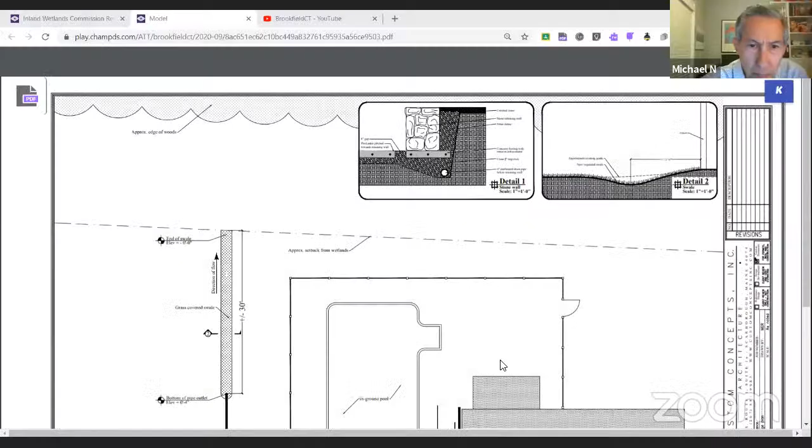Okay, I'm gonna share that to the screen. It's not 14, it's 17, I believe. Yes, sorry about that, 17 Old Turnpike.

So there's the swale, I see the house, I see the pool. And that's just a... Mark, I don't know, can you see that, Mark? There's the drainage and then there's...

Could I ask, which I can't tell from this, what is existing and what is the proposed change you're asking for right now? You want to tell him, Bill, or should I? Yeah, go ahead, Tony.

We brought the leader drains down, and we brought a drain from behind the wall out to daylight. When we brought it out to daylight it wasn't high enough to get the water to flow through the pipe behind the wall, so it needs to drop about 4 inches. In order to drop it 4 inches without creating a hole, we need to create a swale. So what we're going to do is go back to where it comes out from under the wall, which is where the belly of the pipe is, and bring it out lower, but then bring it down the yard towards the wetlands to get pitch so that it goes to daylight.

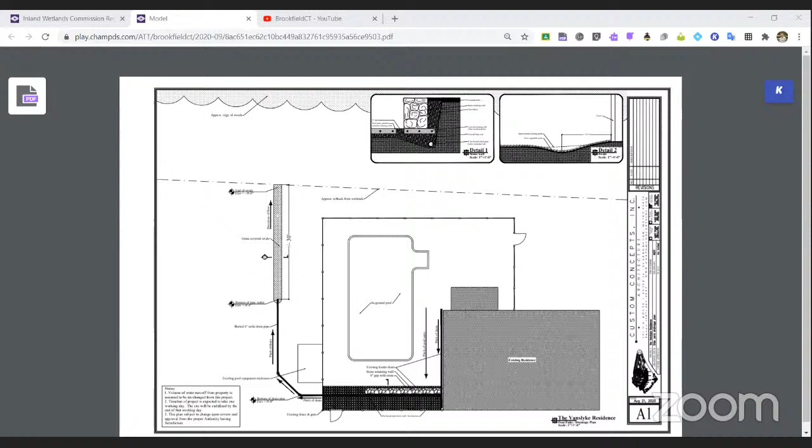I have 2 other questions for you. You have a note here that says the approximate setback from the wetlands. Is there supposed to be a distance associated with that? I'm not grasping why you've got that notation with an arrow pointing to a dotted line. Is that the wetlands line? Is that what you're trying to convey there? I thought it was. Is that right? That is the wetlands line, yes.

So that's not the setback from the wetlands, that's the wetlands line itself, which is what I interpreted it as. Is that right? Yes, that's correct. Okay, the wording is odd. And what is this detail 1?

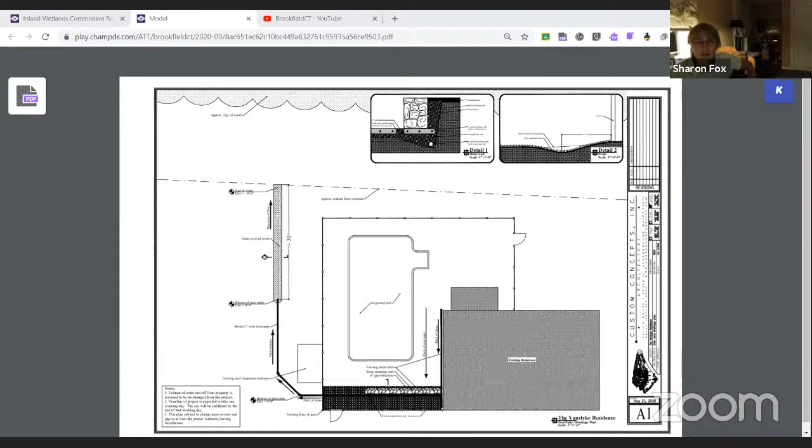There's a stone wall and pipe. That's showing what's behind the wall, that's the pipe with the belly in it. Too small for me to read. Where is that located physically? It's on the drawing, just below the pool. It's the only wall on the drawing. It looks like stone.

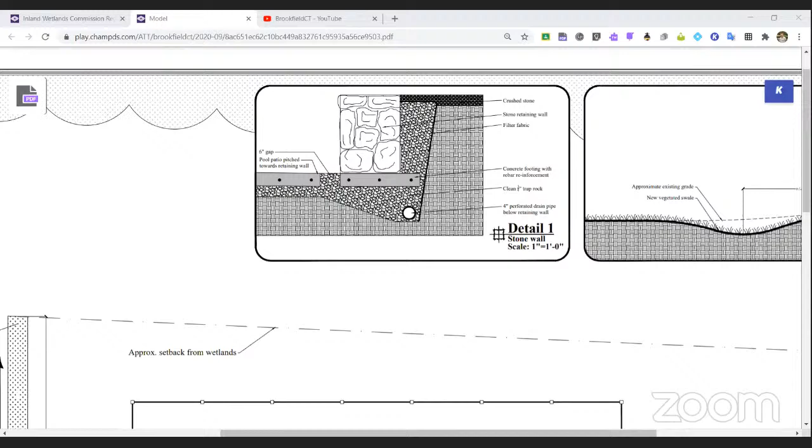At the bottom of the drawing, where the wall is, it comes off the corner of the house toward the fence, parallel to the fence, and then towards the other fence. I see the pitch of the drain. Could you scroll down a little more, Allison?

There's the wall. Oh, okay, there we go. There's the stone retaining wall. So the bottom of this is the high part of that wall, is that correct? The plan south is the high part of the wall, and the pool is on the lower part.

I'm not following what you're asking. Is it, looking to the left is north, to the bottom is west? And the smaller images there, is that actually stone, white decorative stone? And the larger circles, the actual stone wall looking from the top, I understand that.

Which side is the high side of that wall? The pool? To the right along that black... Oh, no, the pool, the base of the wall, or pool at the top of the wall? Pardon me, the pool is on the face of the wall. So if you're at the pool looking at the wall, you're looking at the front of the wall. All right, so the pool is on the low edge of the wall, the low side of the retaining wall. Yes, thank you.

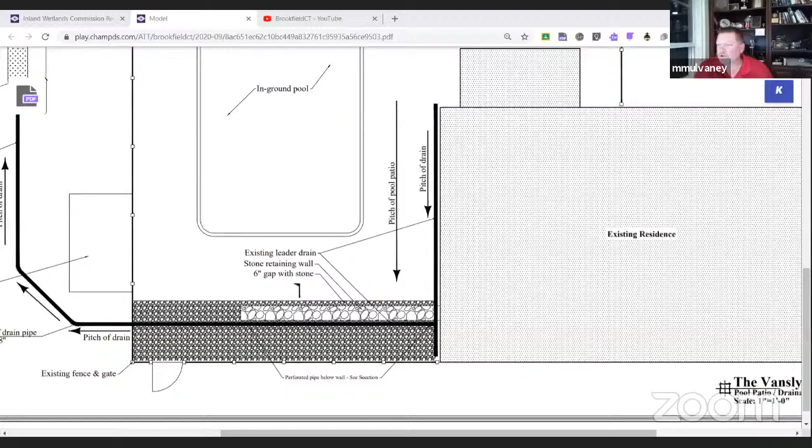All right, someone want to make a motion? I can do that - I'll make a motion. We approve 17 Old Turnpike Road, number W20-34, modification to the existing permit number W20-3, with the additional 5 foot of riprap, number 4-inch riprap, with all the usual stipulations.

Yeah, and there's a plan - it's an A1 plan with a date of August 21st from Custom Concepts, Inc. Thank you, Sharon. I can't see that - yeah, this is much more complicated now. So, all right, we have the motion to be effective the first day after publication, correct? I'll second that. Thank you, Michael. Any discussion on the motion?

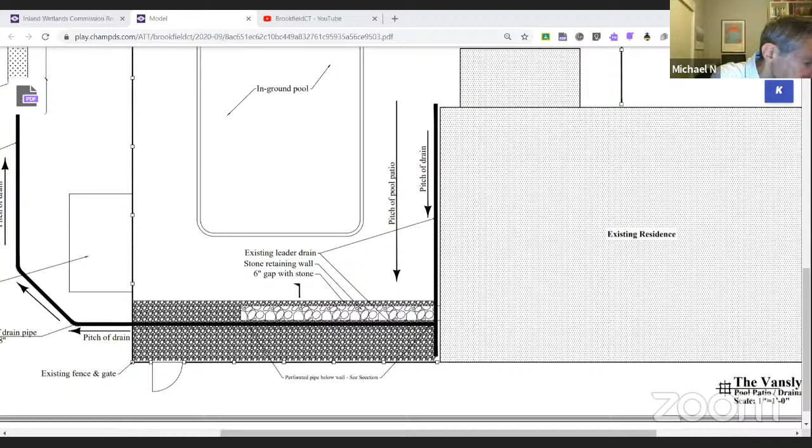All right, all those in favor of the motion? Aye. Any opposed? I will abstain. The reason why is I'm across the street and I don't feel it's appropriate to vote on this.

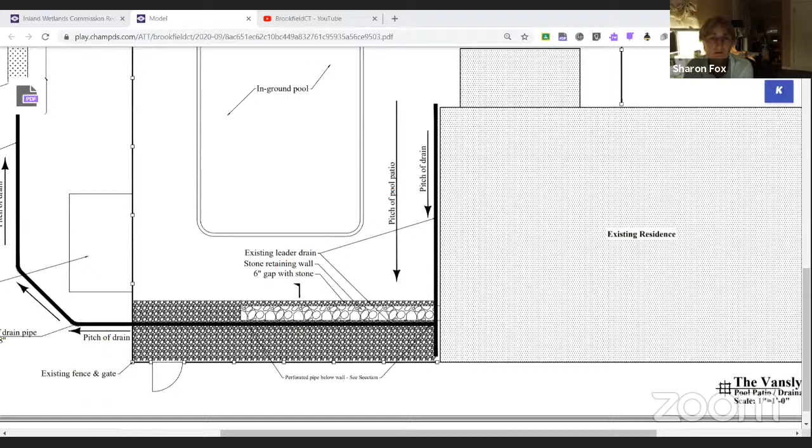All right, so now on to our next agenda item, which is 730 Federal Road. Someone here for 730 Federal Road? There should be a number of us. Yes, I'm here, Paul Scalzo. Steve Sullivan here from CCA. Good evening.

All right, did you recognize the office behind me? It was your brother's. It's good looking. That's right, I forgot about that, Mark. Yeah.

So let's just take a quick look here. I did get a chance to get out there yesterday. I did a drive-by over the weekend. All right, Steve, just help me a little bit here. What is new here? We've got a revised site plan dated, so that's not new, right?

Madam Chair, if you'll let me, I'll list what we submitted for additional information as a result of the last meeting. A couple of things were asked. We submitted a tree location plan, which is sheet C7 in your new packages. It's got every 6-inch tree or greater within the upland review area.

Are those the ones that you guys painted white out there? No, we didn't paint the trees. We staked out the edge of the proposed parking. We made sure that the wetland flags were still in the trees. We also staked out a proposed sewer lateral to 37 Old Route 7. Allison, can you bring up a plan?

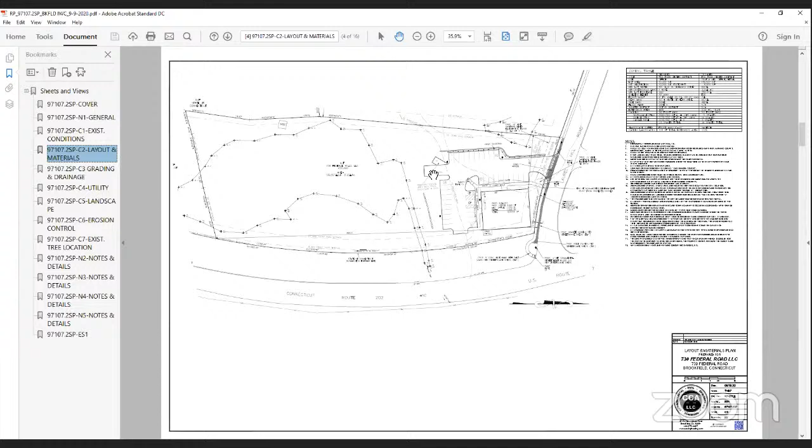We also submitted a report from James McManus, who is on the Zoom call here and can go over a summary of his report and findings. Should the commission hear that at this point? We'd be happy to hear that if this is the right time. Perfect.

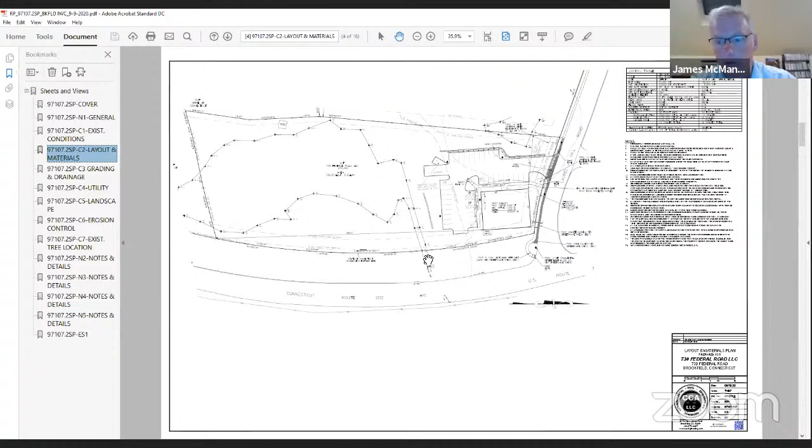Jim, why don't you go ahead? So Steve, I'm assuming you've gone through some of this already, like what we're doing. Correct, at the last meeting, yes. Okay, so I can pull up the landscaping plan. Yep, that's fine.

For the record, James McManus, certified professional soil scientist with JMM Wetland Consulting Services, offices in Newtown. I did the original delineation back in November of 2017, believe it or not, and then I was back out this year on August 20th just to put my eyes back on the project site.

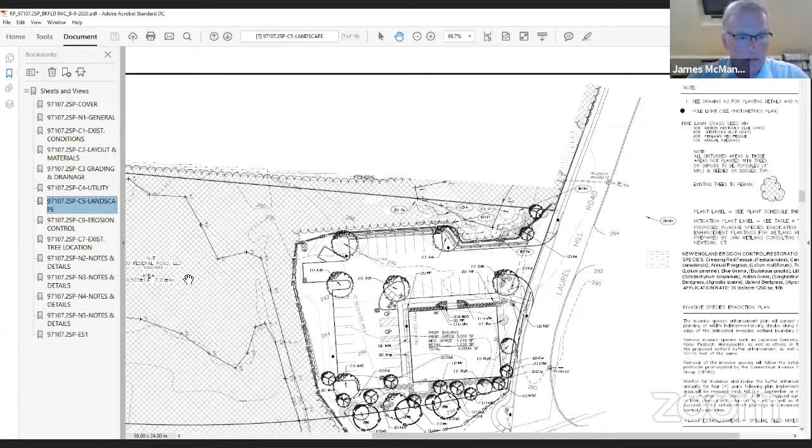There are two wetlands, one to the south, both isolated. One is to the south, which is larger than the other. Steve, if you can point to that numbered series wetland to the south. Yep, right there, so that's that series. We have an isolated, seasonally saturated to seasonally flooded wooded swamp with a ditch in the northern portion that drains it toward a 36-inch corrugated metal pipe under Federal Road.

Typical vegetation found in this particular wetland includes red maple, American elm, sycamores, cottonwoods, honeysuckle (invasive), spice bush, ironwood, multiflora rose (invasive), burning bush or fire bush (invasive), garlic mustard (invasive), cinnamon fern, Christmas fern, bittersweet, and poison ivy. The bittersweet, as you know, is also invasive.

A smaller wetland that you may remember from the property to the west is a small isolated wetland. Most of it is off-site to the west, but a little bit hits our site here at 730 Federal Road. This is a very small isolated wetland that drains north to a 36-inch flared end pipe, which continues under Laurel Hill Road, to points north and to the northeast.

We looked at the function and values of these wetlands, mainly focusing on the numbered series wetland, the bigger one, though we did include the A series even though it's essentially too small to evaluate with this Army Corps of Engineers methodology. However, as you can see from my report on page 4, there's a function and values table.

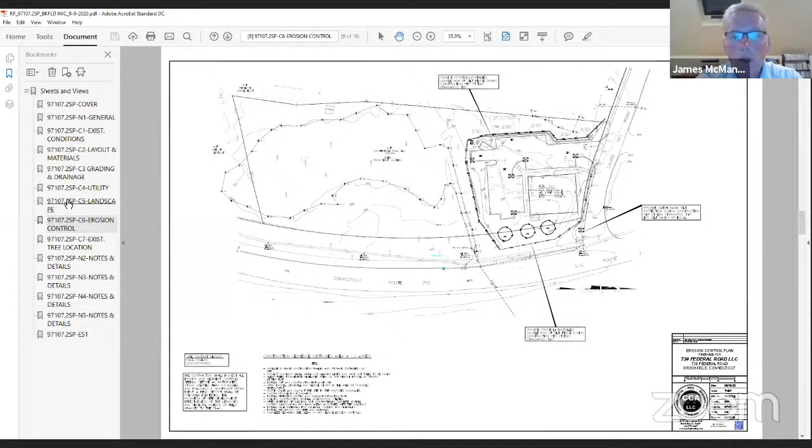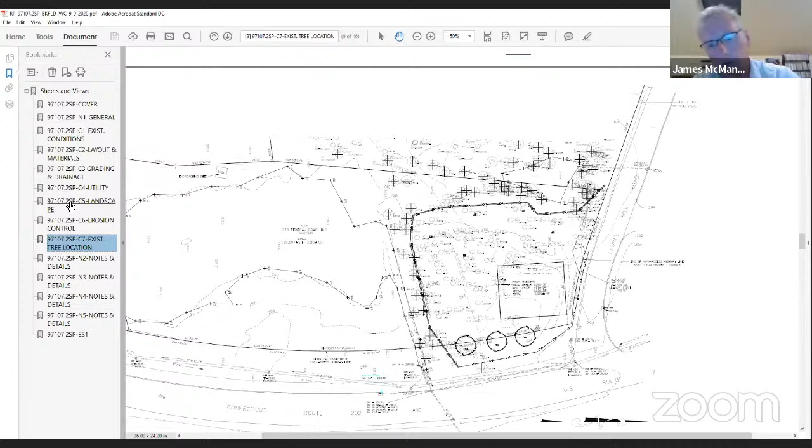Looking at vegetative removal: no trees are being removed from the larger of the two isolated pockets, the numbered series wetland. There's enough trees and habitat left behind and undisturbed that we feel comfortable that wetland won't be impacted. The A series, we'll go through in a minute, has a planting plan and is too small. We also have another planting plan to the west, off-site, that's going to surround that A series wetland.

Wetland hydrology and stream flow: the on-site contribution of groundwater and surface water where the development is, is relatively small, and any water that goes there right now before development is probably intercepted by that ditch and sent to the pipe. So we're very confident that wetland will maintain its hydrology with the proposed development.

On water quality, I don't know if Steve went through it, but we do have a robust stormwater management system that will attenuate the runoff before letting it go, mainly to the A series wetland. Any overflow will go into the numbered series wetland and be ready to go by the time it does all that.

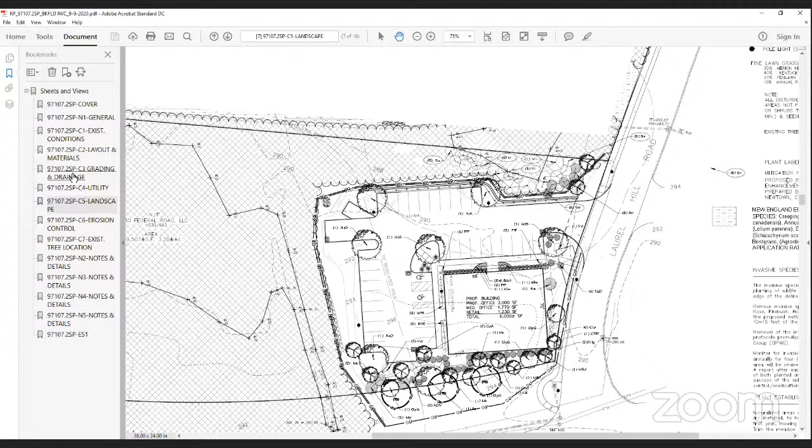We do have some invasive species out there, which I went through in the report, and we have a plan put together. CCA put together a planting plan, as you can see, which includes around the A series wetland. We're also going to have some invasive species removal, and we're proposing a 4-year monitoring plan. Once all the plants are implemented and planted, we will start our 4-year monitoring plan.

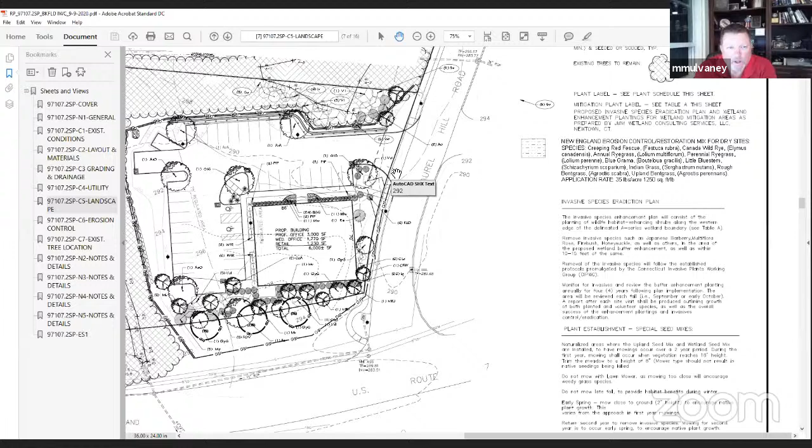Jim asked, is that only on the A wetland or also the B one? The numbered series we're not touching, and we're leaving a lot of trees there. There's not a ton of invasives as you get away from the development. As you get into the middle of this, there really isn't a ton of invasive species.

Most of the invasive species are on the project site to the west, in the eastern or northeastern part of this project site, where the bulk of the invasives are located. However, we can certainly investigate, and there will be some invasives along the ditch.

I'm thinking let's get rid of them now. Yes, that's included. I'm considering the ditch part of wetland B. The main objective is wetland A, because that's where the majority of them are located, but yes, along the ditch is there too.

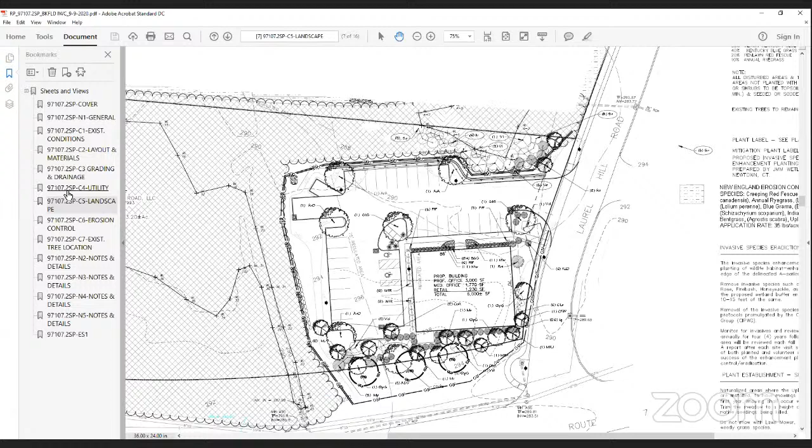Any questions? I'm not going anywhere. Just two that I have, Jim. In your report, you talk about the possibility of some wood turtle habitat in there, or some wood turtles.

If you go on to the NDDB website, this whole area has a big blob over it, and more than likely it's known turtle habitat along the Still River, and that's probably what this hit is all about. It's mainly associated with Still River and potential wood turtles along areas of the Still River.

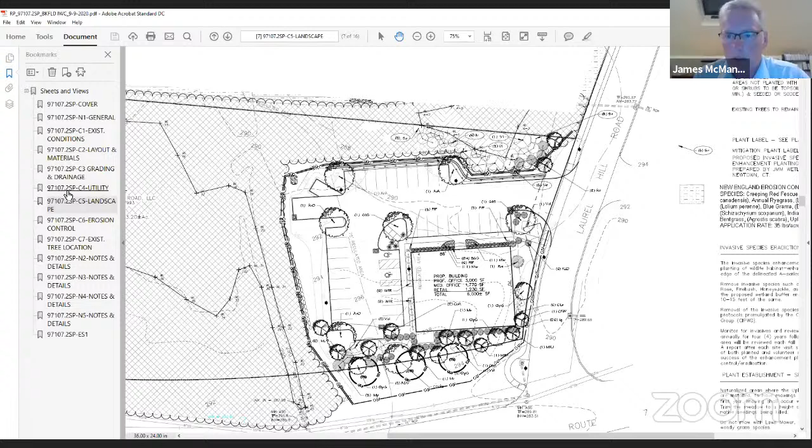There's nothing on this site, but we need to send a note down to NDDB, and hopefully in a relatively quick manner they'll send something back to us describing it, which is probably going to be the wood turtle, because that's what is known in the area.

I have a question on the southeast corner of the parking lot. There's what looks like a giant parking space and another one off on an angle between two trees. Could you tell me what that is? Yep, that's a loading area. This area is a loading area, and then this is the refuse area.

The last plan, we had the refuse area right off the back of it, and I think it was Commissioner Mulvaney who asked us to relocate that, get it further away from the wetland. So I shifted it off from here over to here, so that a truck can come right in, do its front load, back out, and go back out to Laurel Hill Road.

And what's the other thing, just for a tractor trailer to pull in, or a big one? That's just like an SU-30 type. No, this building's too small for a tractor trailer, but an SU-30 type box truck would come in here.

What's your closest point from a wetland? It looks to me to be at the edge of that stone wall, which I would guess would be on the west side. I'm looking at wetland B. Right in this area, Mark? Yeah, that's wetland A. I was actually looking at wetland B, right down there.

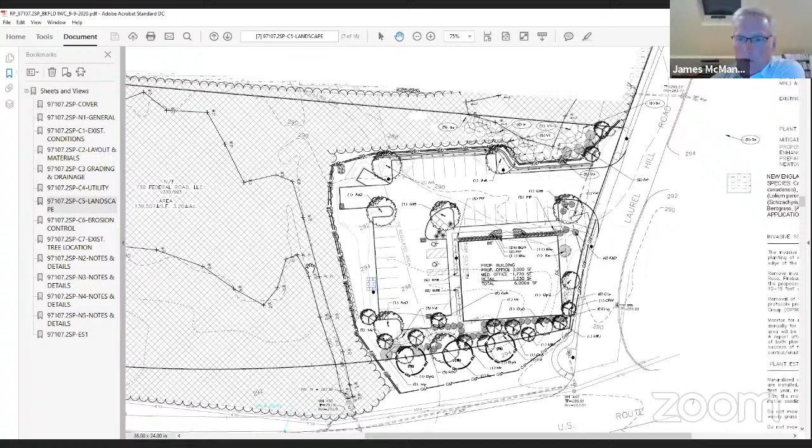Oh, I was speaking of the pound sign, or the numbered sign wetland. Well, again, as I was talking with Mark, the numbered series wetland along the ditch will be worked on as well, and as you go further into the wetland, it's less invasive. But again, we're going to be out there for 4 years, so we'll be checking everything.

So is that maintenance plan for both A and the numbered series? Yes. Okay, is that ditch existing? Yes, the ditch is existing.

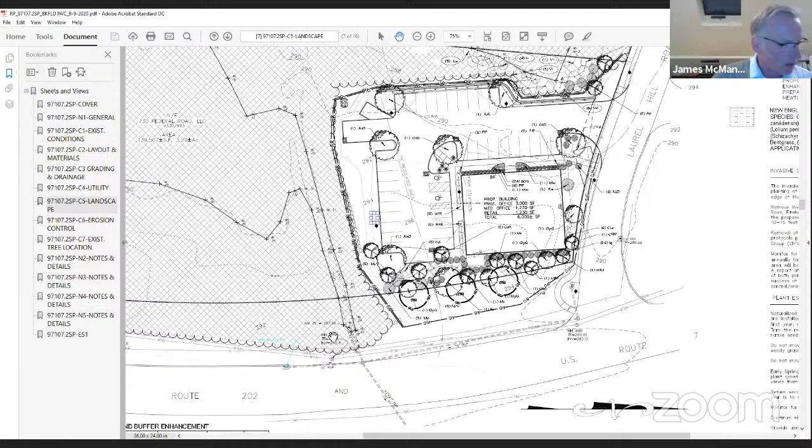If you look in the report, hopefully you have colored pictures - if you look at pictures 5 and 6, picture 5 I took back in November of '17, and then I took another one this year back in August. That's what the ditch looks like. It's sort of shallow, not as shallow as it looks, but it's not a huge incised ditch either.

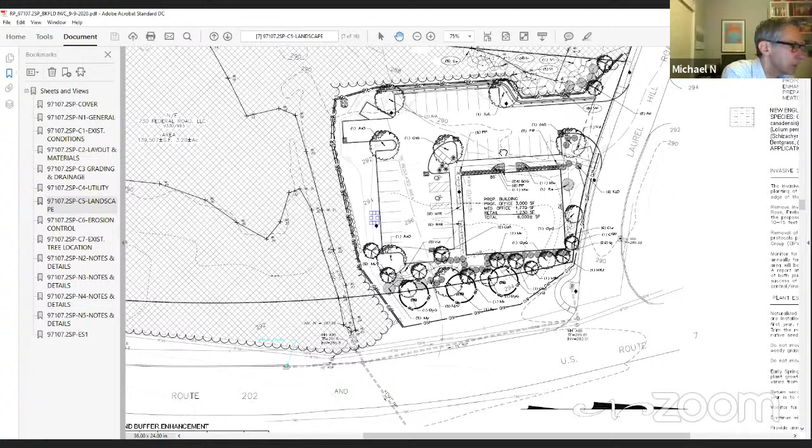No, if you go out there, Michael, watch for the poison ivy. It's pretty evident. I looked at it from the road - you can't miss it. It has a spoil bank into it.

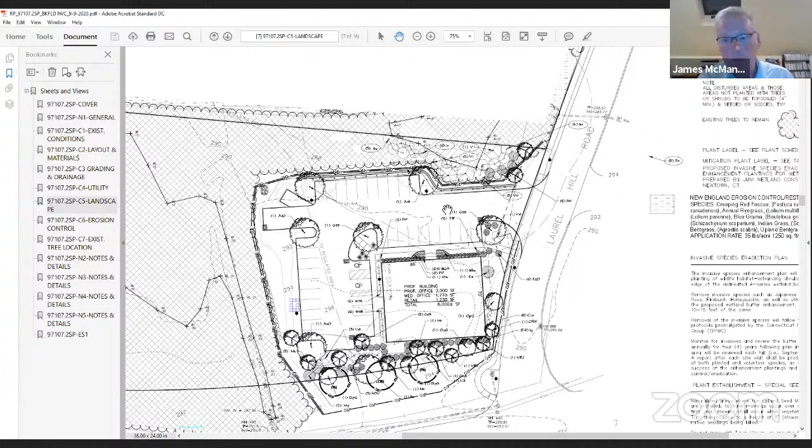And then on 7 and 8, you'll see the drainage pipes. Picture 7 is the corrugated pipe under Federal Road, goes under Federal Road, and then 8 is the flared end RCP - that's the one in the northwest corner of the A series that flows periodically.

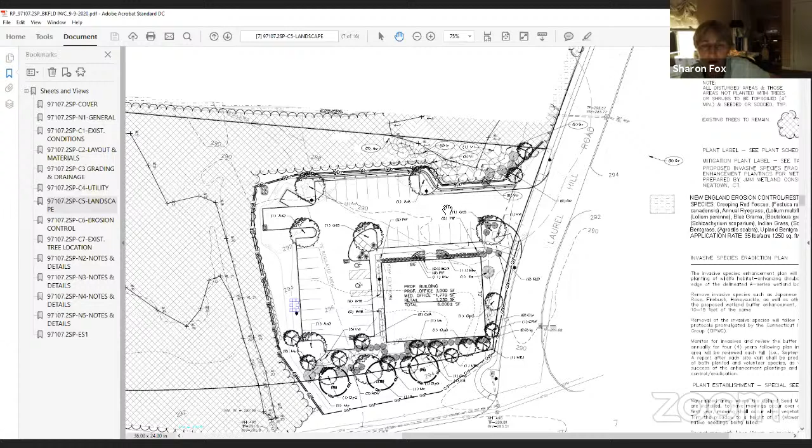All right, like I said, we got your report, I've scanned it. I definitely want a chance to read it. I'll be keen to hear some updates on the natural diversity database update on the turtle. Anything else you guys want to tell us about the material?

Yeah, so as I indicated in my letter dated September 9th, we staked out this edge of the parking. And also we staked out - we want to change the sewer lateral location that goes to 37 Old Route 7, and our proposal is to run it right along the property line. So I just staked out 2 points right on that lateral in the field, so I'm not sure if someone still has to go out there, but you would see those 2 stakes.

I saw them and I'm going, what the heck is that? I did see them. I actually tried to get in there, and that would look particularly hard to get in, so I actually went on the Federal Road side, but that's what those stakes are for.

Right, and so this area is going to be disturbed because of the streetscape, the sidewalk, and the granite curbing and that sort of thing. So I tried to keep that as close to that backside of the sidewalk as possible. There's an existing water main that's just off the edge of the road, right in here.

Okay, but you haven't gotten that out there - the 36-inch RCP with that, though, right? Are you going under it or over it? We would be going over that. Yeah, okay, otherwise you'd be 8 feet deep to the top of it, right, correct.

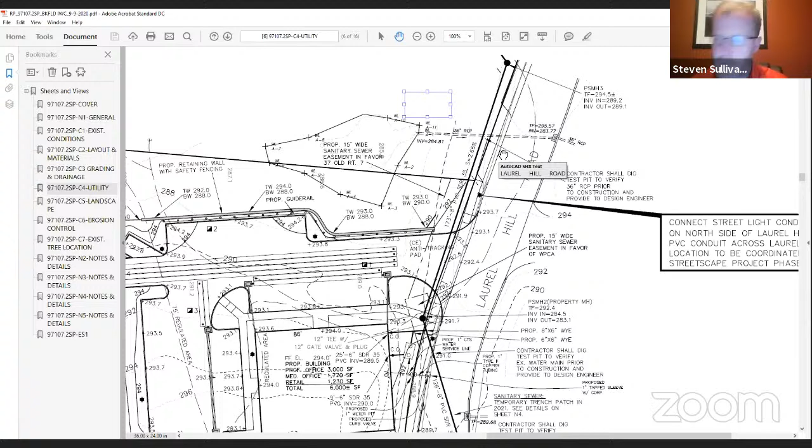But other than that, that's all the new information we submitted since our last meeting. Well, like I said, we've got time on this one. This is a decision date, October 27th, so we've got some time. I want a chance to read Jim's report again and go through these. And when you get the Natural Diversity Database, I'll be interested in it. Anything else, Dave, Michael, Mark?

If I'm thinking about a motion to continue. No, I think it's covered. Yeah, I'm close, but I'm fine with continuing it and doing a little more research. I'd like to get into James' report a little better too, personally.

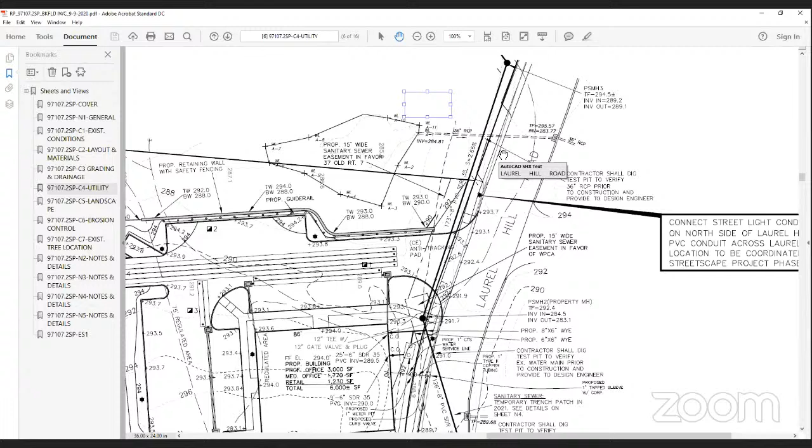Okay, with that, someone want to make a motion to continue? I'll make a motion we continue 730 Federal Road, number W20-35, to our next regular scheduled meeting. Second. I'll second. Any discussion on the motion? All those in favor? Aye. Any opposed? Any abstentions? Motion carries unanimous, 4-0.

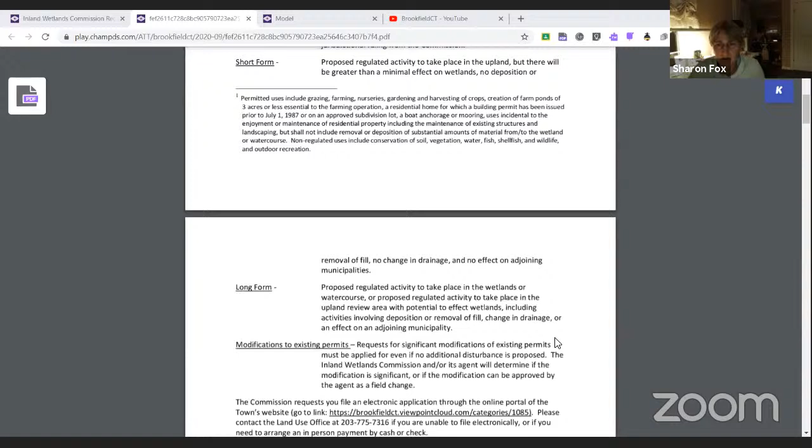So we've got the applicant's name, Tony Pina. I hope I said that right. Mr. Pina, we don't see you on there, residential, we don't see you there. So what we've got here is, let's see, total acreage 60, disturbed wetlands area is 0, total wetlands area on the property is blank, disturbed linear feet of water courses is blank.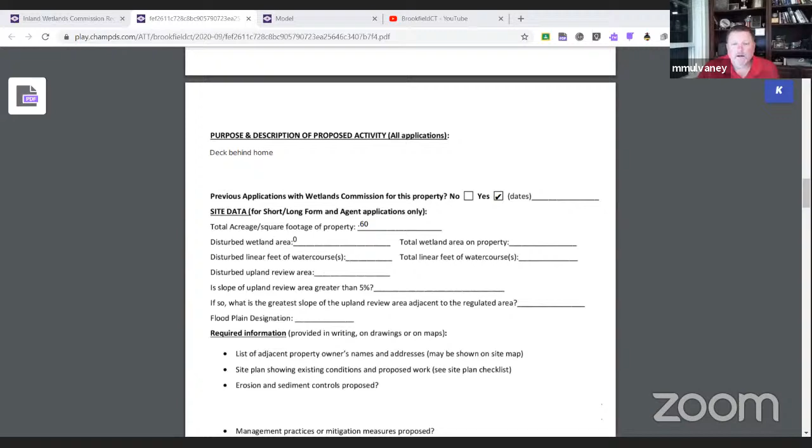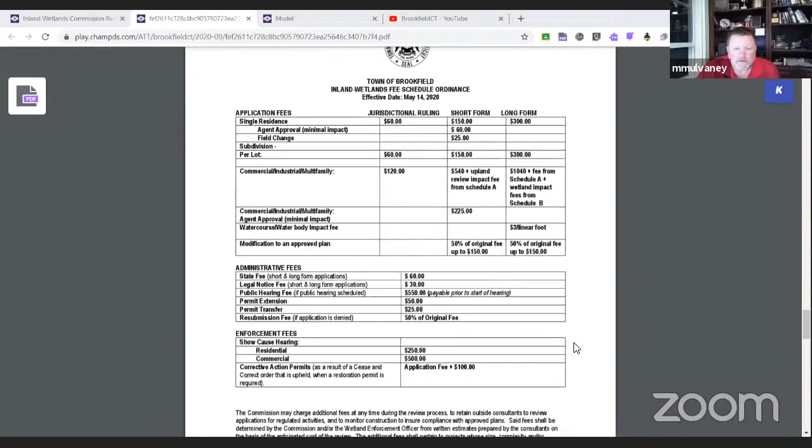Could you go down a little more? Maybe we'll get something with some information. Nothing, nothing, it's all blank, blank, blank, blank, blank. Electronic signature, blank checklists, or fee schedule, that helps. Oh, you want that? No, no, no, I'm just kidding, I've seen that a thousand times.

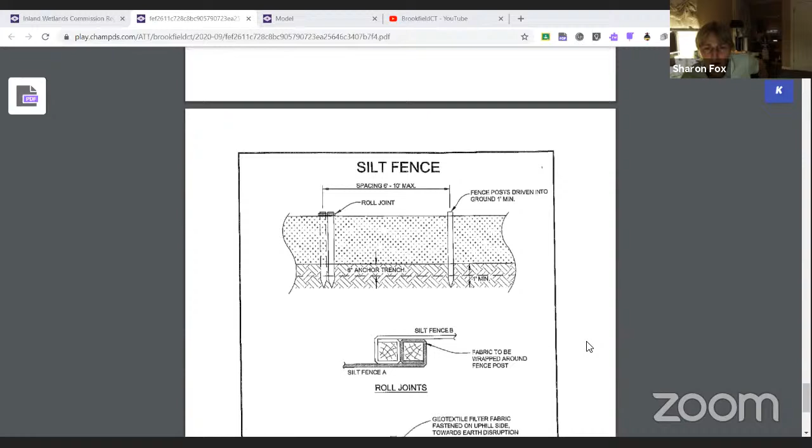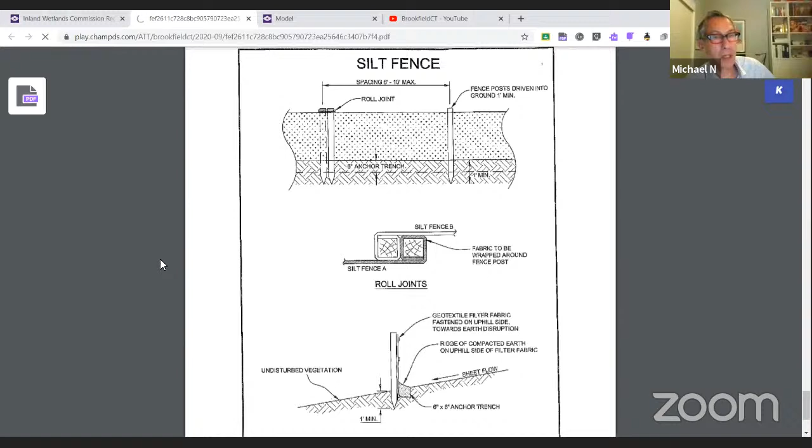Oh, okay, looking for anything filled out. There it is, okay. I just hopped over to the GIS map. Is that where you guys went to? I can't pull up anything right now. Mark, the first time I got them, I couldn't either. I called or emailed her, and she sent me another set of plans with the ability to log in or pull things up.

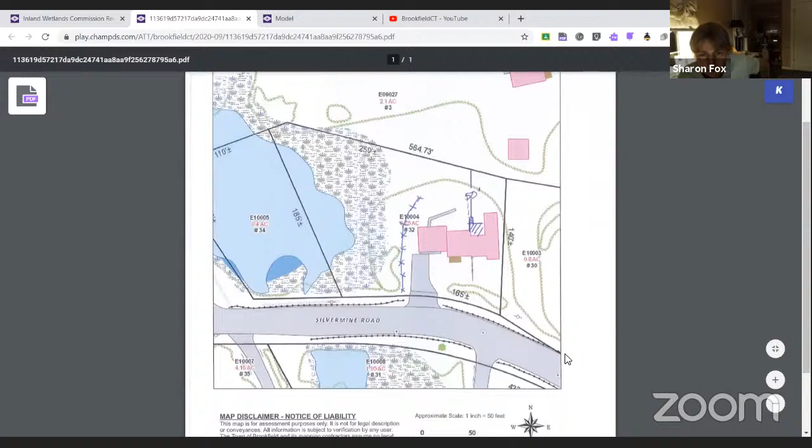All right, well, I'm looking at the GIS map. Allison, can you go to the next one? Yeah, is that the one? This one, yep. And Alice, you're familiar with this one, right? Yeah, you mentioned it to me this morning. There's a permit, that crosshatch, yeah, he got a permit for agent approval actually for interior demolition. And I asked him to do that because even though it's interior, it's close to the wetlands. So he put up the silt fence, did it very well.

He wanted to put on that deck, but he was going to have to do a separate permit for that because it's exterior changes. And it's about 75 feet from the wetlands, not quite.

But it's well protected due to the wall in the back of the house and the existing silt fence, so I saw it as pretty straightforward. Did he tell you if it's wood or stone, or is there any excavation planned besides maybe footings? Just a couple footings, yeah. And you think the house, or the edge of the garage-ish, is probably 40 feet from the wetlands there-ish. Yeah, and the deck is further away.

75 feet from the wetlands. And the 50 feet is to the lot line, right? Yeah, I'm not sure why that is, but some portion of the deck is in the upland review area. Maybe not even all of it. The wetlands extend a little further in than the map shows, a little closer to the silt fence, so that would bring it to 75 feet, or 73.

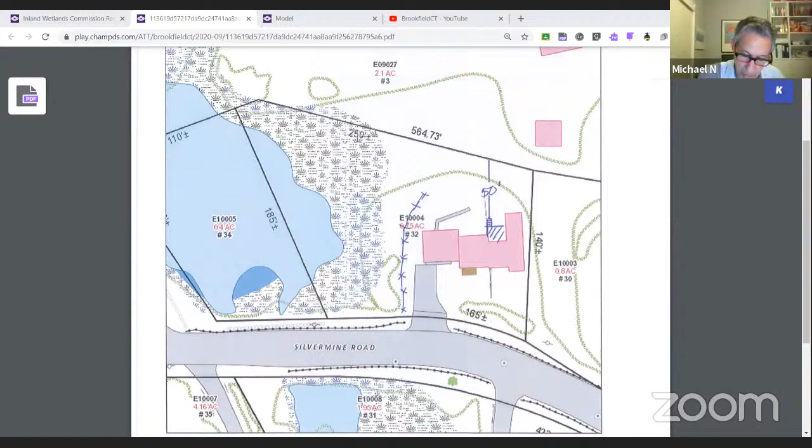I'll make a motion we continue 32 Silvermine Road, number W 20-37, to our next meeting. Second? Do I have a second? Yeah, Dave, seconded. Sorry Dave, didn't hear you, you cut out. Any discussion on the motion? All those in favor? Aye. Any opposed? All right, motion carries 4-0, unanimous.

So we will come back to 100 Candlewood Lake Road, but I would like to suggest we go to the public hearing. That's what I was going to suggest. You want a motion for that then, Sharon? No, I don't think it's necessary.

Now all I got to do is find it, let's see, we've opened this public hearing. We did that last time, and due to the late hour I want to thank the applicant for that. So again, for anyone here from the public, this is a continuation for 731 Federal Road. We briefly gave the applicant an opportunity to present it, but the hour was late, so we drew that meeting to a close. We did not have any public comment or questions. We will do that this evening.

So if you're here from the public and interested in 731, we're going to give the applicant an opportunity to take us through the application. There are a couple of reports I know they want to talk about. Then I will turn this over to the public portion. If you're there from the public and have questions about the process or the application, we'll give you the opportunity. We'll look for you, mute buttons, raise hands, all that good stuff.

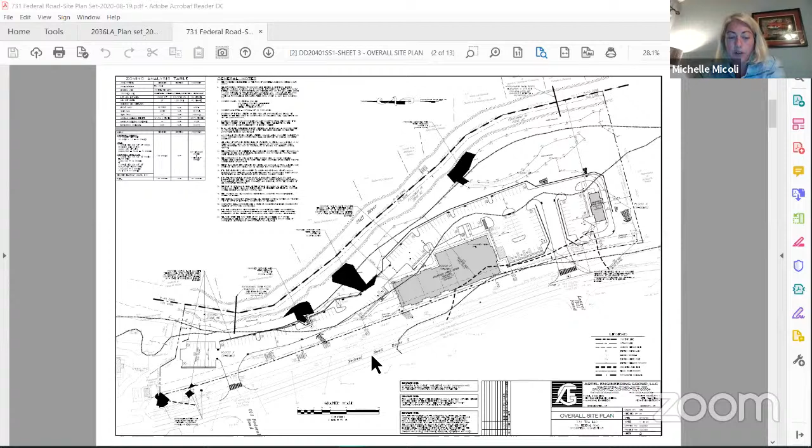I'm gonna go to this plan. This shows, it's a little hard to see with the hatching, let me zoom in a little bit. We have a wet swale that's treating the drainage coming from Federal Road as well as drainage from our parking area here with stone check dams. We have an additional wet swale here that is capturing, where we're piping the discharge of the federal drainage down. And again, our discharge is here.

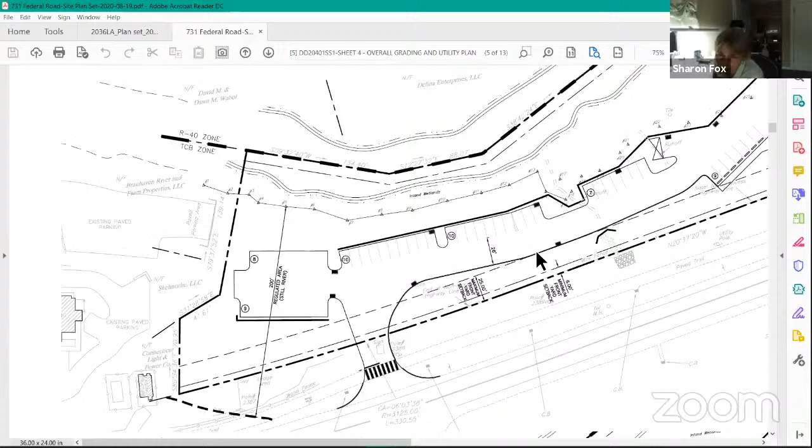One second. Oops, oh sorry. It's okay, don't worry, it has a mind of its own at the second. Don't worry at all, here we go. Let me get back to that sheet. This is the one I was looking at.

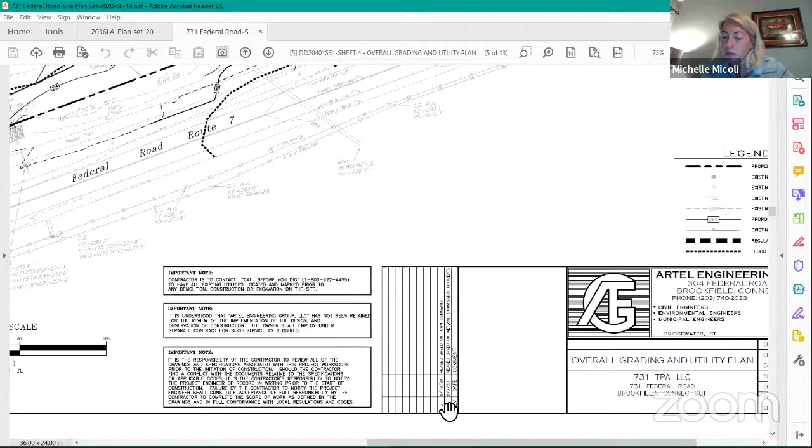Okay, sorry about that. Michelle, while you're looking, can you just tell us the revision date on this one you're showing? What is it? 8/19/20. Okay, thank you. That was submitted for the last meeting, the previous meeting.

Just to continue, so the roof drainage for the middle building, the large building, is going to be infiltrated into subsurface infiltration units. Going south, we have a forebay that leads into a wide wet swale. It's a 20-foot wide wet swale, with another small infiltration system to treat the building. The changes that we made since the last plan, there was a large stormwater basin in this area that we eliminated based on recommendations from Steve Trinkus.

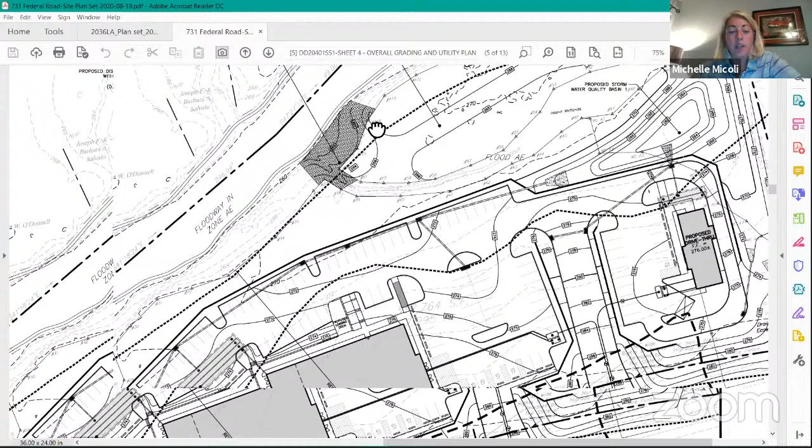We deepened this basin and made it a forebay basin and added the 20-foot wide swale. We added two wet swales with check dams to provide treatment. The drainage from Federal Road was discharging to the Still River without any treatment, so now we're providing treatment that will remove pollutants. The stone check dams will remove trash and pollutants before it goes into the Still River. We also pulled the banks back a little to flatten them so there's no erosion. By making those modifications, we now have...

8,313 square feet of disturbance to the wetland area. To offset that, we have wetland mitigation areas providing roughly 15,000 square feet of wetland mitigation.

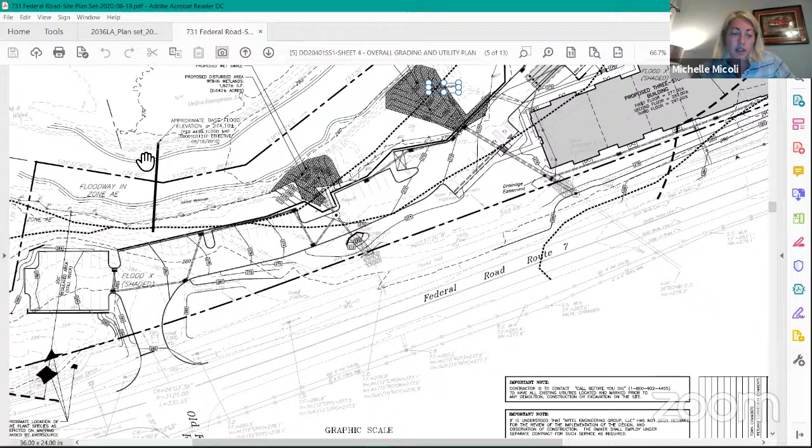Another change we made to the plan was the parking lot in the northern section. We shifted it because there's an area of rare plant species, so we shifted the parking lot to maintain approximately a 40-foot buffer to protect that rare plant species. Those were the majority of the changes we made based on Steve Trinkus and Eric Davidson, the town consultant's, recommendations.

I don't know if Jody, Abigail, or Jim have any comments. So the disturbed wetland areas that you've calculated are...

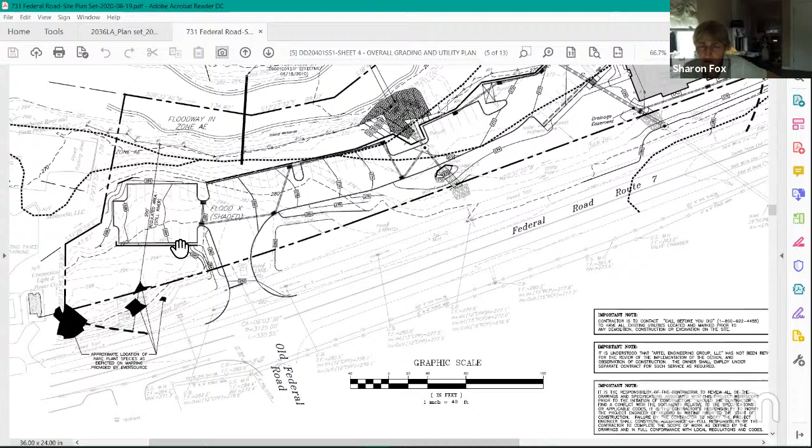Help me make sure I understand them. They're the drainage— sorry, go ahead. No, they're that drainage area where your mouse is, right? Yeah, the dark shaded areas are those disturbance areas in the wetland review area. Okay, in the actual wetlands. All right, and that was, like I said, they're all the discharges from the wetlands.

They're discharges from the road. Sorry, from the road. Okay, yes. Because the pipes now discharge within the middle of the property, and we're extending them down a little further. We pulled back the grades, graded in a wet swale to provide water quality treatment and pollutant removal before those drainage pipes discharge into the Still River.

All right, thank you for that. You're welcome.

Yeah, I don't have the— okay. All right, and Dave, Michael, Mark, any questions for Michelle? I know you guys want to take us through. No, I think I'm okay.

I do have my concern, as I expressed last meeting, about the flood levels you've shown. You talked about the height to keep them above the flood level, the 100-year flood I believe it is, but those numbers were done 10 years ago. I continue to be concerned that this site, even the way it's drawn now, would be subject to a significant amount of flooding reasonably often. Things have changed in the last 10 years, and I think we're going to see more rainfall. I would be concerned whether the floor of the buildings and the parking lot are high enough to avoid the flooding.

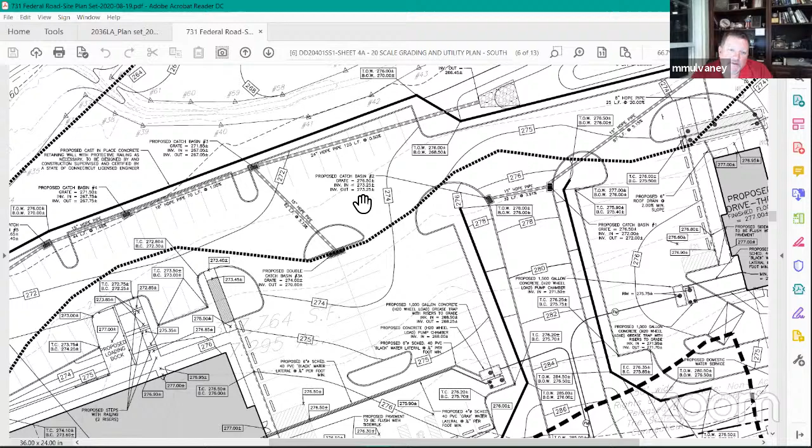What does that do to the people on the other side of the river? If the water no longer comes this way in a 100-year flood, where does it go?

Does it flood out the properties on the other side of the river more than they would have now? Well, because we have the basin and the wet swales now, it'll get caught there. But if we're talking a flood where the whole Still River is flooded up to 274, the water is going to get restricted on your side of this project. Instead of overflowing the banks of the Still River, it's going to get pushed somewhere else, and the only place for it to go is all those property owners on the other side of the river.

Well, it'll still flood our property. It will, but now it's going to hit that retaining wall. I don't remember what the topography is there now, but you're raising it up a couple of feet, so it's going to restrict it and send it somewhere else. Is that right? Absolutely. Do you understand? No, I understand.

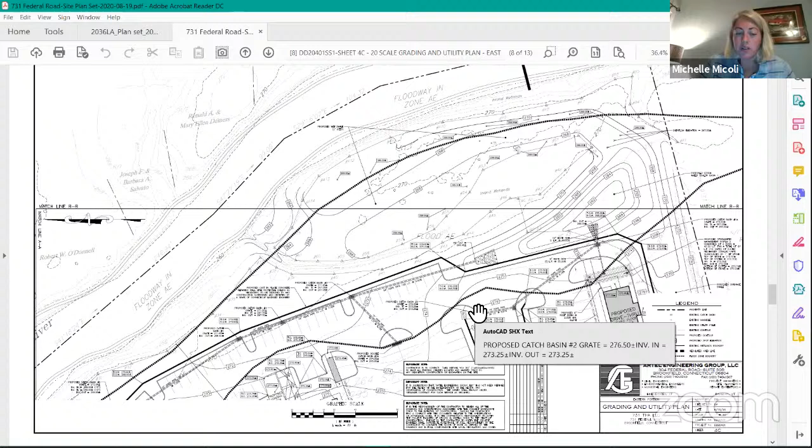I still think the water is going to continue to cut onto our property and still flood it. Well, it's going to hit your retaining wall. Are you saying in a flood like that it'll go over the retaining wall? I think it'll still go over, and I'm just trying to back up — that's only when it gets up to 276 that it goes over your retaining wall. So at the 100-year event at 274, what happens if we're at a storm that gets up to 275? Well, it's going to go onto the other side more.

Well, also with our grading we are cutting, so we're going to have more storage for the flood water. I don't know how much storage you can have to store the flood from the Still River.

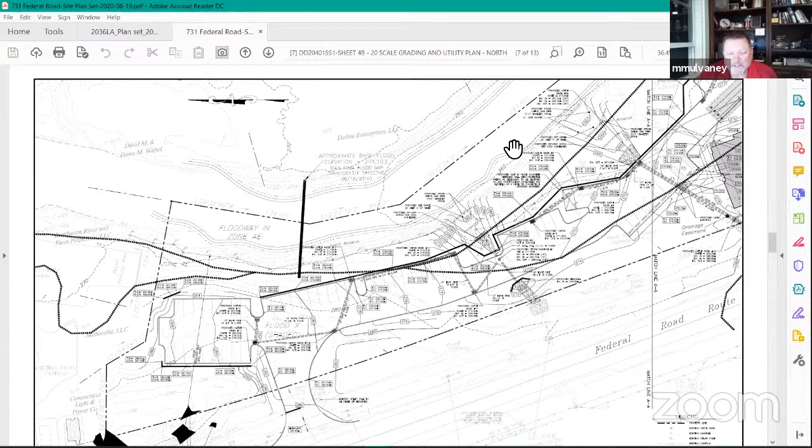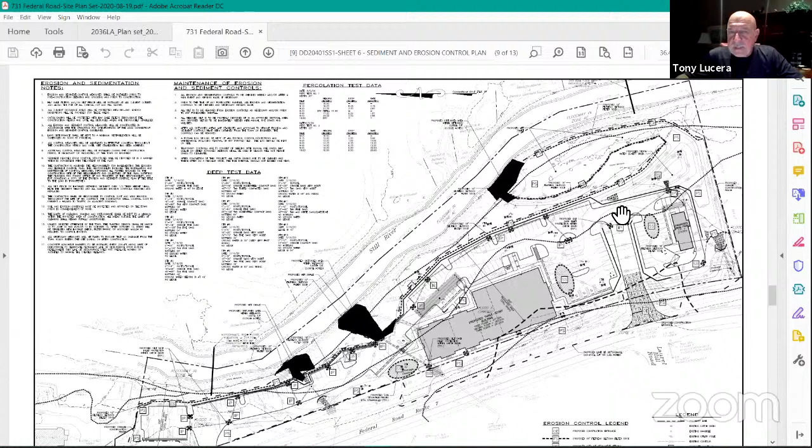It would have to be — this is Michelle, Anthony Lucera, the applicant. We don't have enough of the topo of the other side of the river on our plan, Mark. So what we will do between now and your next meeting is get that topo so we can address your question more efficiently. We'll also confer with Steve Trinkers and get his input on what we're doing on our side of the river and what effects it would have on the other side. So I'd ask to table that question until the next meeting.

Absolutely. Thank you for addressing that, Mr. Lucera.

Mark, this is Steve Trinkers. I'd like to address some of this preemptively. You do have topo across on the east side of the river, and there's a fairly steep bank there to the properties to the north. Under FEMA mapping, you don't want to be impinging the floodway — that's the limit of the flowing water in a 100-year event. In the floodplain, you may do work where we have the forebay and the broad wet swale, which are slightly cut, increasing the storage within the upland area adjacent to the two wetlands.

While the wall is up at 275, at the southern end of the site I believe it gets a little lower because of the topography. If you have the event, because the Still River is flowing north, that's where the water is going to come from. But it's also important to note, from a timing aspect, that the runoff from this site is in the river heading north long before the peak from Danbury gets up this way, so it's not a coincidental peak on a 100-year event.

Also, every 100-year rainfall event is a 24-hour event — midnight to midnight criteria. If you look at historical rainfall records, I've got data from the early 2000s, three years from WestConn Weather Center in the center of Danbury. We had two hurricanes in 2004, both four inches in a 24-hour period. But you will not find the 100-year event that, according to NOAA, is roughly an eight-inch rainstorm by records. What we are seeing are more short-duration, high-intensity storms — you get three inches of water in three hours, basically.

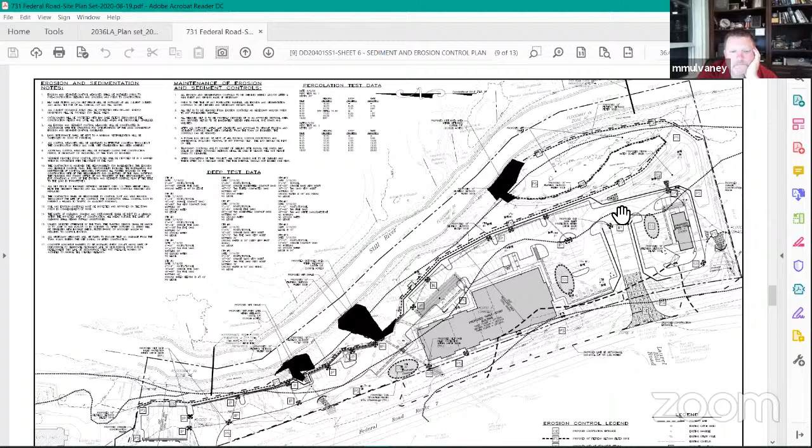On this particular site, the roof runoff is going into the infiltration system, so that's not going to the river — it's going to provide base flow to the river long after the rainfall event has occurred. Surface runoff is going to be discharged to the river again, long before all the impervious cover to the south, all the way back to Danbury, shows up at this particular point.

I do not believe, based on my 40 years experience, that you're going to see any additional flooding either on this site or across the river. When we reviewed the site up the road, where the daycare facility was and some other buildings, you could see on the banks pretty much where the flood line has been from large storm events, about 3 to 3.5 feet above the nominal water surface. Just looking at the topography here, you're going to be well within the existing banks on both sides for that type of an event.

So it's more of a concern with these short duration storms. That's why putting the drains into the soil is a good thing that reduces surface runoff. Also, the southern forebay and long wet swale that goes to the south and then comes back to the north is very flat, and it's taking water a long time from point A to B, from the discharge of the stormwater till ultimately reaching the Still River. That gives it time to infiltrate within some of the upland soil areas. But I don't have the concern that this site's going to be subject to any more flooding after development than it currently is today, again based on my experience.

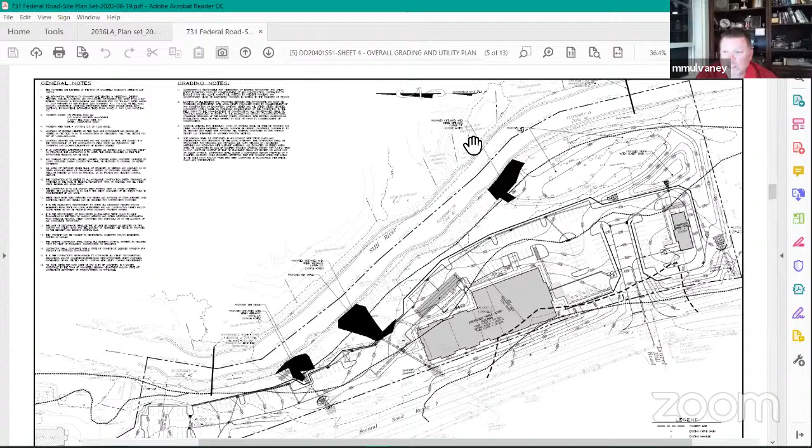I appreciate that you seem to have looked at that. To follow up, could I ask if you're aware, are you sure that the bank on the other side of the river is higher than the top of the retaining wall on this side? They have a lot of contours here. I don't know if I think that's something we'd like to look at. Sarah offered to get this information. Yeah, we're going to get that information for you.

It looks like 270 is over here. 276 is right where she's got the cursor now. So what is the top of our wall? Our wall is 276. So yes, the wall is higher than the 270. Correct. But you also have, again, a 270 contour here up to 272. The water is going to follow, it's going to be a level water surface, and it's just going to basically spread out along both sides. But the flooding is also subject to a restriction across the channel.

And I'm not aware of any hydraulic restriction north of this site that causes a backup of water, like a dam or a road crossing that's undersized where it restricts the flow. The flooding is a backwater condition that develops where it cannot spread out and it's basically constrained. Years ago in the late 90s, when we did a project in Ridgefield, we had Hurricane Floyd come through, which dropped 12 inches of rain in 24 hours, theoretically a 250-year event. On George Washington Highway, the town had 2 fairly large box culverts under the road, but they were unfortunately partially filled with sediment over the years.

And yet those box culverts, even being compromised, still passed effectively a 250-year event without overtopping the road. So, the larger the watershed, when you're looking at a site like this, everything would basically have to be frozen and completely impervious to have any kind of impact at this area. But even if it occurred, it's going to be such short duration, maybe an hour, that you might have an inch of water in your yard and then it's gone. It's not going to be a significant flood event. They don't happen that way.

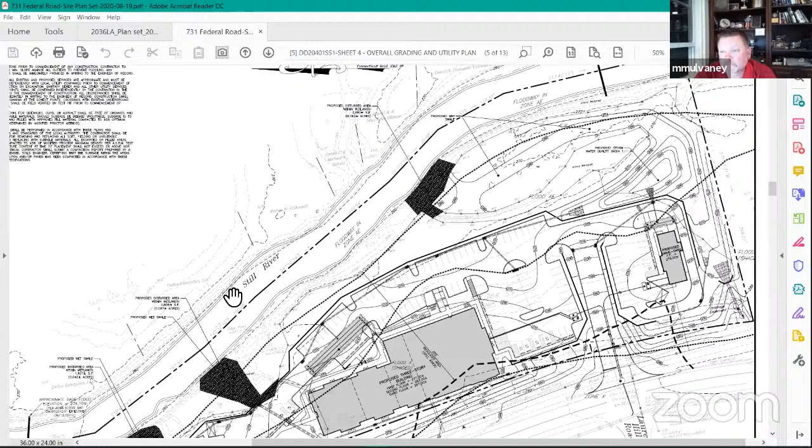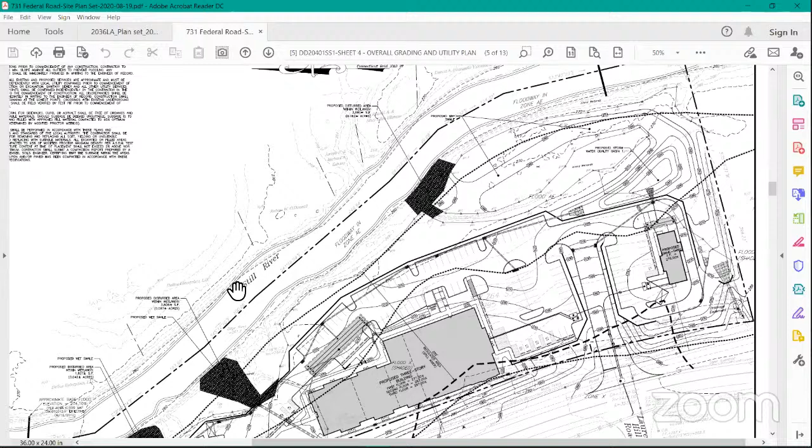All right, more questions? I just think that the site has to be developed so a 100-year event isn't catastrophic. I don't know about the 250-year event, but that's what we have to worry about, and it's also just predicated on the last couple of centuries, not anything that might come. The climate changes constantly, but we just have to go with the averages. Well, I think we do have to be concerned about the changes in the climate that we're seeing every day now.

All right, more questions for Michelle? You guys have Jim's report and got some landscaping. What else do you guys have for us? You want us to take a look at? I think, Madam Chairman, Anthony Lucera, applicant, the other information on the plans is self-explanatory, and I think the questions that Mark and Michael are asking us are the most important for us to address at your next meeting.

I don't know, I have a question for Alice, though, as to where we are. We gave you an extension. I thought it was through tonight, and I think I need to give you another extension, or are we okay, Alice? Let me take a look here. I have on the agenda that today would be the day, because I said there was that big delay with Labor Day. So you have 62 days left for extensions. If you could consider, you know, another 30 days, 35 days, let's take a look at our meeting schedule. Alice, how many days more can I give them an extension so we don't have to do this at each meeting? You have a total of 62 days left for the whole process.

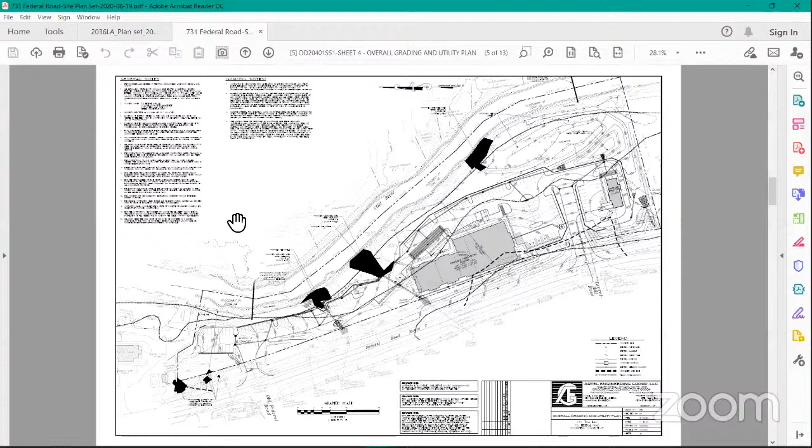Can I ask a quick question, Alice? Maybe you know the answer. It's Monday, October 12th. That's also Columbus Day. Is the town closed on Columbus Day? Yeah, I think it's the 13th, right? The meeting is Tuesday. Oh, so we did switch it to Tuesday already. Okay, and just to keep in mind while we're talking about meeting times, the next meeting is the 29th, which is a Tuesday because of Yom Kippur. Right, so the next 2 meetings are on Tuesdays, to keep us all on our toes.

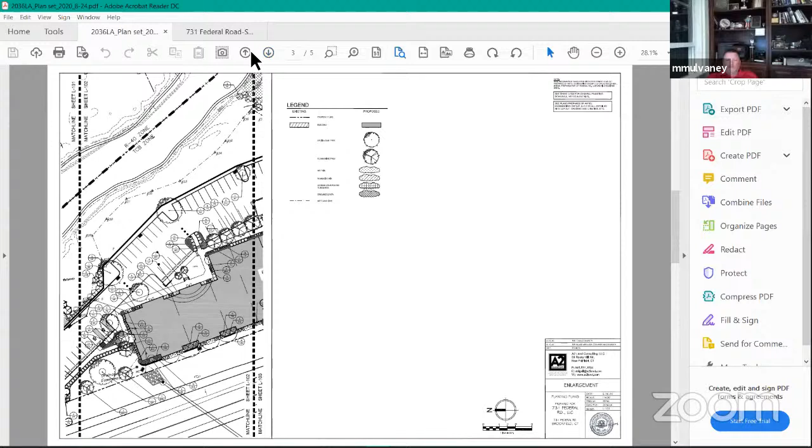Can I ask a question while we're on that drawing? Sure. I see Federal Road, just trying to get everybody on the same page. I see a little grass strip, the greenway, then another grass strip, then your planting, then a dotted line. Is that your 25-foot setback or your property line? That's the property line.

So then you have all those buffer plantings and the parking lot starts. Is that your 25-foot setback, where you have all the plantings? Yep, sorry, I can't use my mouse on this to show you. Those are all front yard buffer plantings that are required for zoning in the front yard.

So it comes down to zoning versus wetlands. Is there an opportunity to cut down on those and slide the parking lot closer to the property line, and get zoning to give you a variance instead of being that close for the whole parking lot to the Still River? I don't think I can answer that question right at the moment. That's a significant redesign, I believe. I understand, but you're significantly close to the Still River.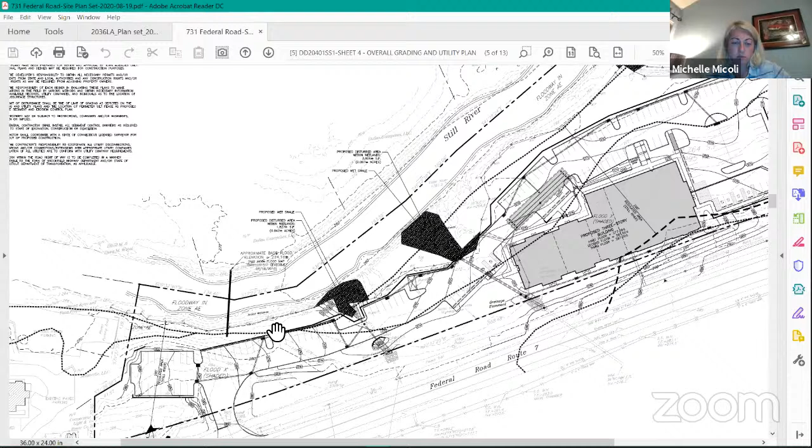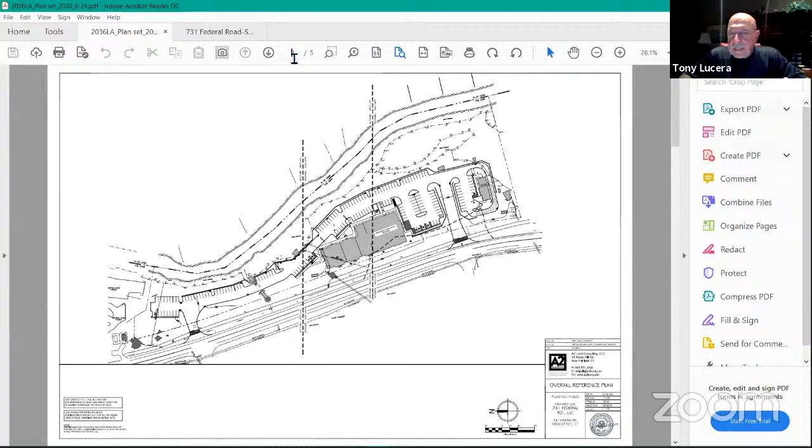Does one of the plans show the trees that are going to remain? No, we just have limit of disturbance. Back to Mark's point, so Mark, what you'd like us to do is revise the plan, disregard the zoning regulation for the front setback, and when we apply to zoning, can they waive that themselves, or do we have to go to ZBA? You broke up a little, at least to me, in the middle of that. I'm sorry. Yeah, same here.

We can't hear you now. Unfortunately we're having technical difficulties. There we go. I am not muted unless somebody muted me that I don't know about. No, you're just breaking up. I think it's just a bad connection, every so often you just break up.

Where I started the meeting: so you want us to move everything 10 feet to the west, addressing it with zoning as a requirement of the wetland. I think you mean to the east. No, to the west. You're right, I'm sorry, to the west. Tony, I'm getting the gist of what you're saying, I can't hear all of it. That is what I'm suggesting, and I'm just one commissioner recommending 10 feet.

I realize zoning's still going to want a buffer, but can we ask what the other commissioners would think? Oh yeah, you can ask the others, but my reasoning is that in an upland review area, we learn more and more over time about riparian buffer zones, which are supposed to be 100 feet, and that's a very valuable resource around the Still River. So 30 or 40 feet is one thing, but as much as we can, I want to leave that buffer zone. Let's hear from the other commissioners.

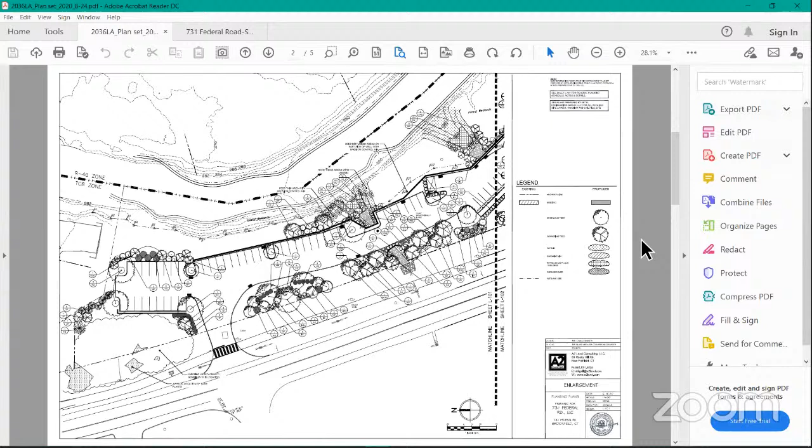Again, I wanted to let - well, we have to coordinate this now with zoning, so I don't think... zoning board of appeals, so. Actually, we do not. We do not have that coordination.

What we're going to do is we're going to revise the plans, assuming you approve them. Yeah, because your approval will be the foundation under which we're requesting the variance. Right, that would be the hardship, that was our approval. Right.

Anything else for us or the commissioners' questions for the applicant? Again, I don't want to give the public short shrift, if there's anyone from the public that has a question or wants to speak about the application. I do not see anyone from the public signaling at all. So again, if anyone is here from the public and has a question about the application, or about something you heard this evening, we're looking for raised hands or people unmuting.

There used to be a chat, and we don't see anything. I don't see anyone from the public either. I see nothing. All right, so again, no questions.

Let me just ask the public, is there anyone here who wants to speak in favor of this application? Again, I see no indication of anything. Anyone from the public want to speak in opposition? And again, I see no one from the public.

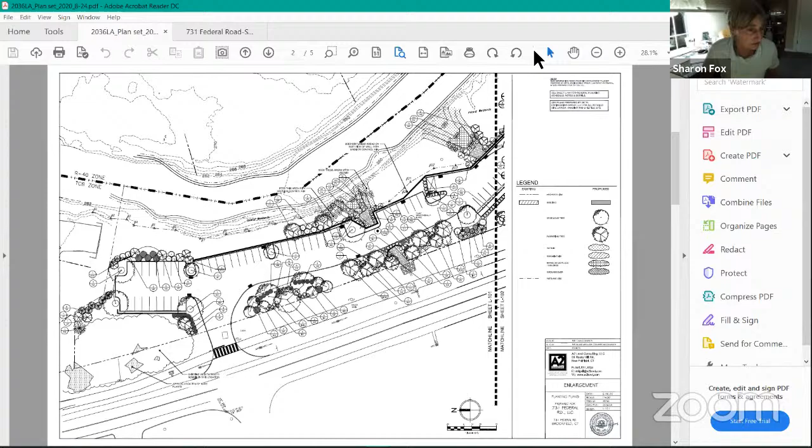All right, if there isn't anything else, I'll take a motion to continue this public hearing to our next meeting. I will make a motion that we continue item 731, 731 Federal Road, item W20-35, public hearing to our next regular scheduled meeting on Tuesday, September 29th.

Okay, thank you. Second. All right, was that Dave? It was Michael. I think it was Michael. All right, thank you, Michael. Any discussion? All those in favor? Aye. Aye. Any opposed? I hear four ayes, no opposed. All right, motion carries unanimous.